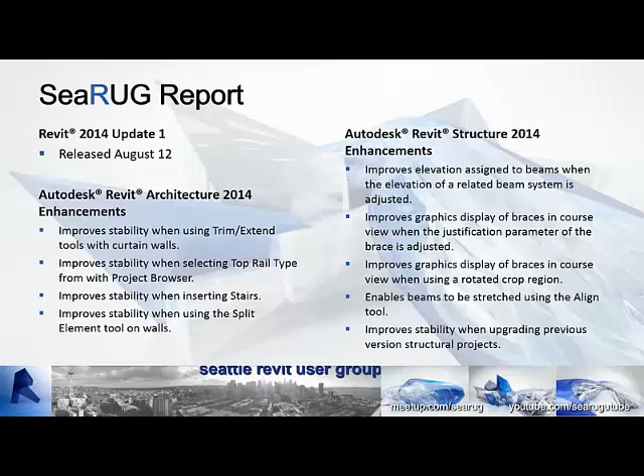A handful of MEP updates. These will all be posted, it's all on a PDF list, so as soon as you go to get your update you'll see all these plus a whole series more.

I just wanted to grab some of the highlights and some of the overall platform, exporting if you use that, rendering in cloud. I know we use that a lot, so see some of those, a handful of improvements there.

This was interesting: it maintains display order of filled regions which overlap solid hatches in projects that are upgraded to 2014. So if you've already upgraded your project, sorry, you've got to go fix it. But there are a lot of companies with a policy of not upgrading until the first service pack comes out, quite a few actually do that. So this would probably be a good opportunity to start planning your upgrade now that the service pack is out. It sounds like they've fixed a lot of stability and some performance issues as well.

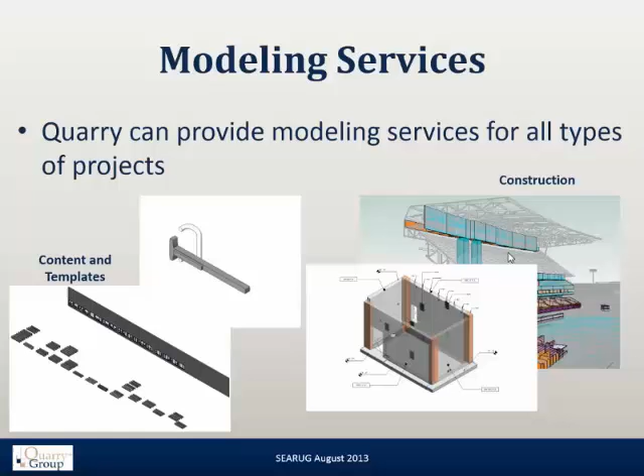We also work for design teams, helping them set up their content, building custom families for them, getting their systems and templates all set up and ready to go. Here's some of our coordination takeoff models. We've also worked for owners doing as-built and facility management models.

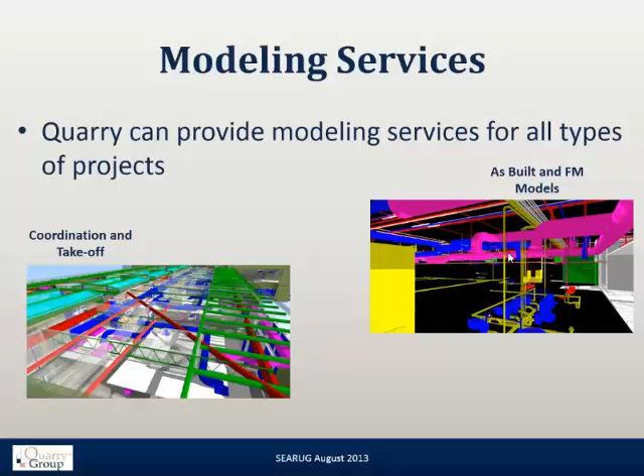One of our latest services that we've been doing for a lot of our client teams is BIM management. We work for either a contractor or, in some cases, the architect, managing the BIM process throughout design and construction and on into ownership. Some of the things we'll do is set up a BIM execution plan to help them work their way through the process. We have BIM websites that we've set up that let people upload and download models, exchange information, and help people collaborate inside a BIM environment.

If people are interested in that, we can certainly help you set up your models and your project. We can do quality control reviews, constructability reviews, and collaboration tools, so we can figure out what you guys need to work on, areas of the model that are problematic, and areas of the model that are really well put together.

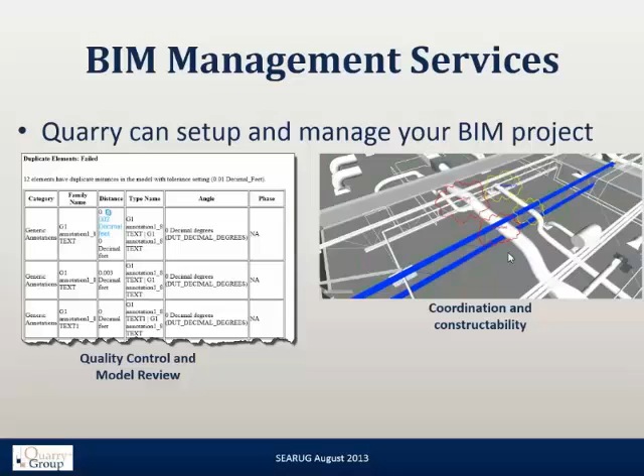Okay, so today we're going to discuss detailing in Revit. Let me see a show of hands: how many people here detail exclusively in Revit? About a third. How many people detail exclusively in CAD? How many are 50-50?

So we're going to discuss some common issues with detailing, and why people don't do it. We're going to look at the tools that Revit uses to assist you in detailing. We'll look at 2D detailing and 3D detailing, and discuss the pros and cons of each. We'll talk about how you customize your detail component families, then create an overall strategy for detailing, and we've got a question and answer period.

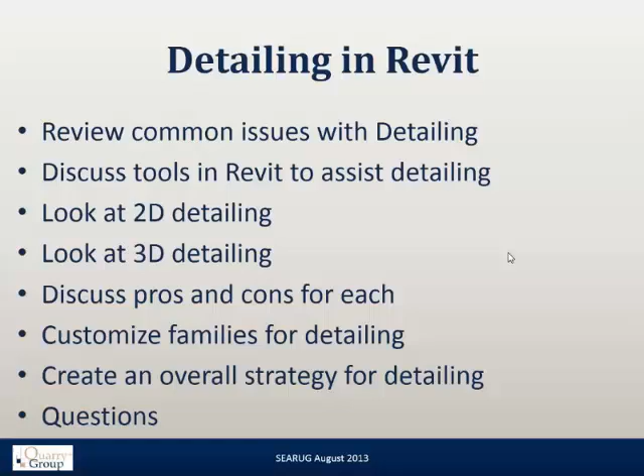So, some common issues with detailing, or roadblocks as I put them. The first one I always hear from people is, well, if you do it in Revit, then all your details have to be 3D. Doing your details in Revit makes your file size go crazy. Detailing is slower than if I do it in CAD. And Revit has poor drafting tools—I use the word poor, but I've heard various other adjectives used for Revit's drafting tools.

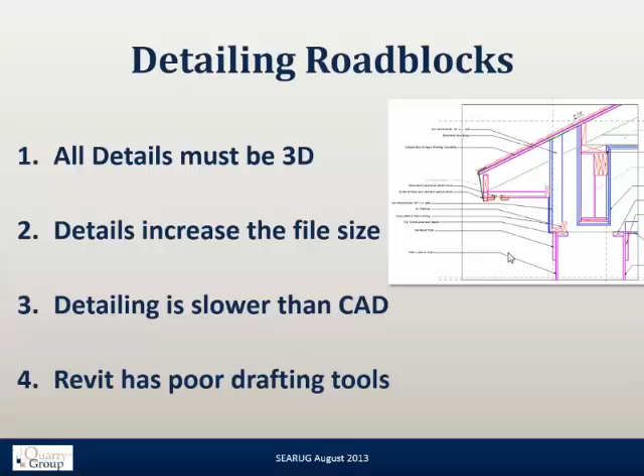I won't use the four-letter word that I've heard a number of times.

Number one: all details must be in 3D. False. Revit has tons of two-dimensional only tools to help you build your 2D details. Drafting views, which have been in Revit since release 2, were specifically designed for people to draft 2D details. They have very little other purpose.

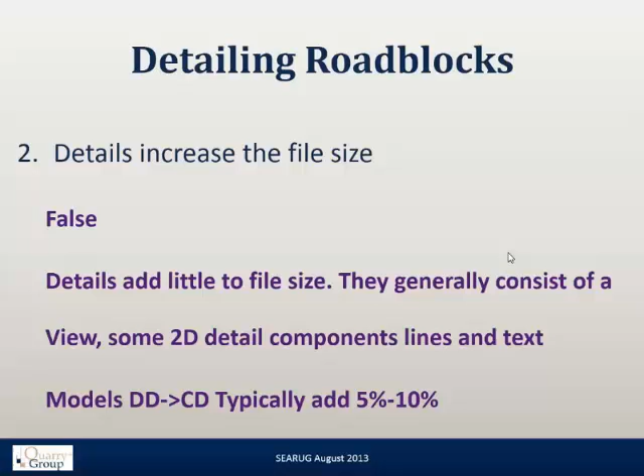Details increase the file size. Also false. They do very little to add to the file size. Obviously, as you add stuff to your file, the file gets bigger. However, most 2D detail components, lines, and text add very, very little to the file size. Our models, typically between DD and CD, see a 5 to 10% file size increase.

Detailing is slower than CAD. This one's a bit of a loaded question because slower is somewhat subjective. But if done correctly, we think Revit can save you time in your detailing.

The first reason is printing from a single system and file. When we tried to do composite detailing with sheets and sheets of AutoCAD details and sheets and sheets of Revit drawings, it took us all day to plot. We had to set up special dummy views, set up dummy sheets, go back and check every single CAD detail to make sure the references were correct, and then plot and plot and plot and plot.

Utilizing the model as part of the detail: Revit's model can show you a lot of information that you don't have to redraw. This gives you faster revisions. If the model changes, those areas already being driven by the model won't have to be redrawn or edited or changed.

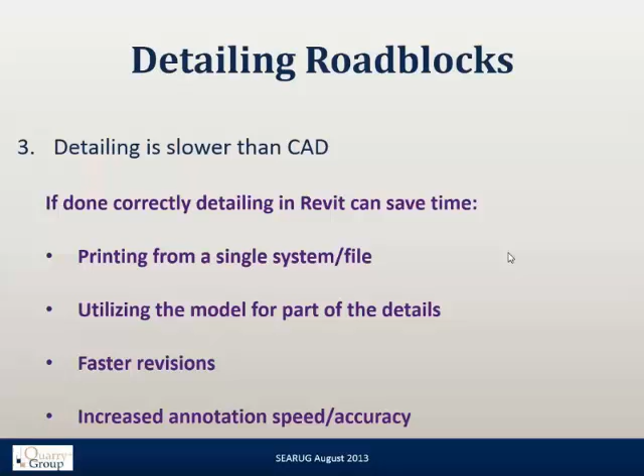And then there's increasing annotation speed and accuracy. We've got some annotation tricks that'll help you improve your annotation speed, so you won't have to be typing text notes all day long.

So, Revit has poor drafting tools - also subjective. Revit has different drafting tools. We miss the precision, the snaps, and the awesome editing tools that AutoCAD has: the ability to extend multiple objects, multi-trim, fence commands, and all those other tools AutoCAD developed over the last 30 years specifically for drawing. Remember, that's all AutoCAD does - it draws. Revit has never invested in those tools because Revit does so much more.

There's really not a need for that if you learn how to use Revit's detailing tools the way they were intended to be used. What we look for is using components and pieces of the model rather than drafting from scratch.

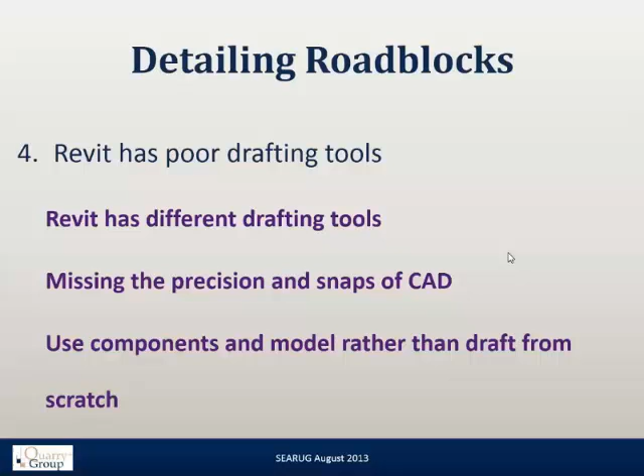So, Revit's drawing and editing tools do not equal CAD. That is clear - AutoCAD's drawing tools are much more superior than Revit's basic drawing tools. But if you use them properly, you will save time and effort.

Now, the way we see it, setting up your details at the beginning correctly will allow you to move through the system a little bit better. The first thing is, rather than use drafting views, we want people to use the detail tool and the section view tool. A couple reasons for this: first, you can utilize the model if you choose - it's not required, so you can turn the model off in your detail views.

Number two, your details are then organized together. Here's a shot from our project where we organize all of our details together, and you can see that each detail type has its own folder under our project browser. Very easy to do.

And we'll talk about this a little later - we have pre-built view templates that already set up most of what we want it to do when the detail is created. It comes out of the box all ready to go, and all we have to do is fill in some of the blanks.

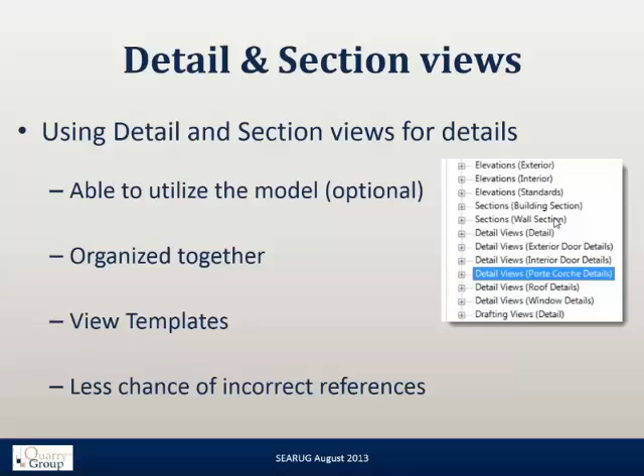So this is direct from the detail cut, and what I did was I turned the view template off on this one and turned it on this one.

So in this case, this would be a detail that was cut, and you can see we've got roofing materials, fascia, roof joist, structural, and ceiling joists already ready to go. If we were going to just go straight forward with this detail, we would leave it alone. But by applying a view template, we halftone it first, and then we apply a second view template, the model goes away entirely, and all we're looking at is our drafting.

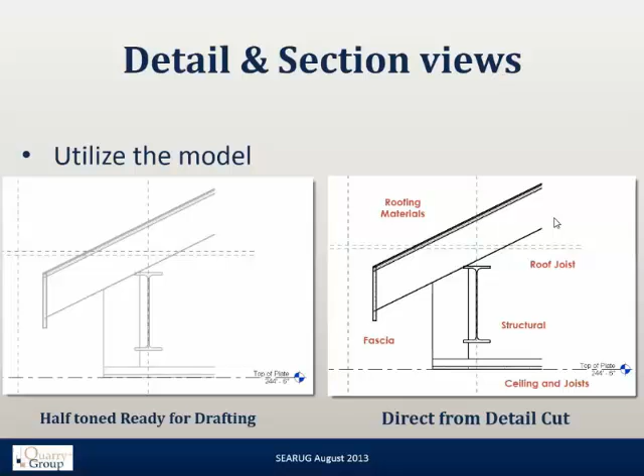So just by utilizing the model as either an underlay or as part of the detail, we're already ahead of the game as far as drafting is concerned.

We set up our details to have different types so that when we cut a detail, we pick the right type, and Revit automatically puts our details in folders together. This way, we don't have a thousand details under the detail view in Revit, having to scroll down through that list over and over again. We can open up the roof details and just look at roof details, open up the door details and just look at door details.

Templates. As I pointed out, we've got view templates already set up. So we've got 1.5-inch details, 3-inch details, 3-inch HS head jamb sill details, and a generic detail.

What those view templates do is they set up the model and the view to display the model the way we want it to, and to display all the items the way we want. It can update line weights, turn off linked views, turn off CAD, turn off whatever else we want. So our view templates are preset, ready to go.

So when a user cuts a detail and picks the right type, it automatically creates the detail the way they want it to be.

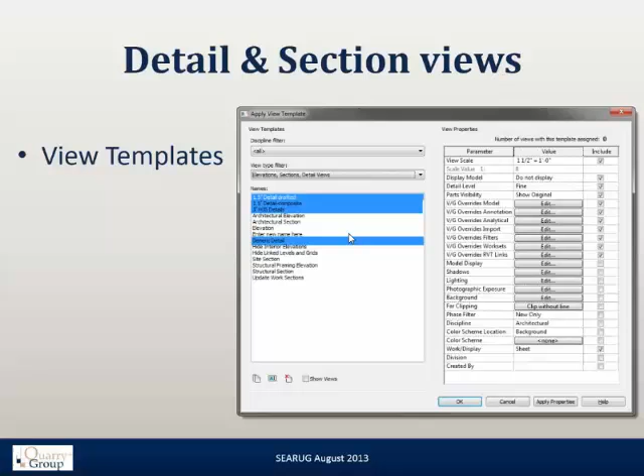Okay, and incorrect references. This is the list of views that are available to use as references for a particular section cut, and you can see the list is quite long. Now, luckily, Revit does show you the number and sheet you're referencing, but it is very easy, and I've done it hundreds of times, to accidentally click one above or one below.

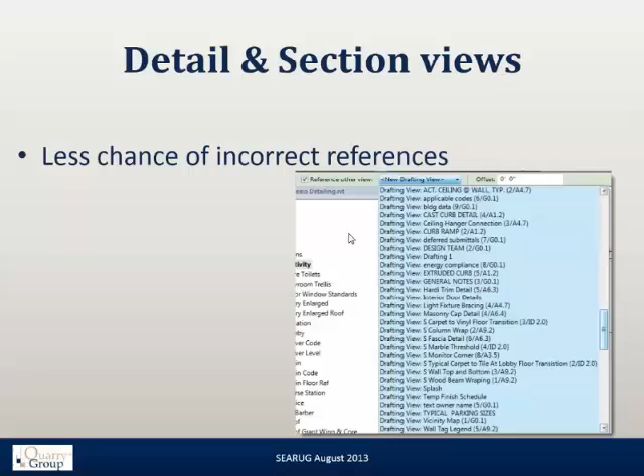And then your detailing system falls apart very, very quickly.

So, detailing tools. Number one, with 3D tools equaling 2D details, we're going to use the model element to start our details whenever we can — system families, walls, floors, and roofs.

So again, we use view templates to save time. What we're looking at here is a detail that I just cut, and it's all set to go.

And if I don't have a view template, I usually do things 1, 2, 3, 4. One, I set the scale. Two, I set the level of detail. Three, I crop it the way I want it. And four, I set the visibility controls. So I do all that when I create the detail rather than later down the road.

Now, if we've got a template, it can save me the time of having to do 1, 2, 3, 4 — or just 1, or 2, or 3, or 4 — depending on how the template's set up.

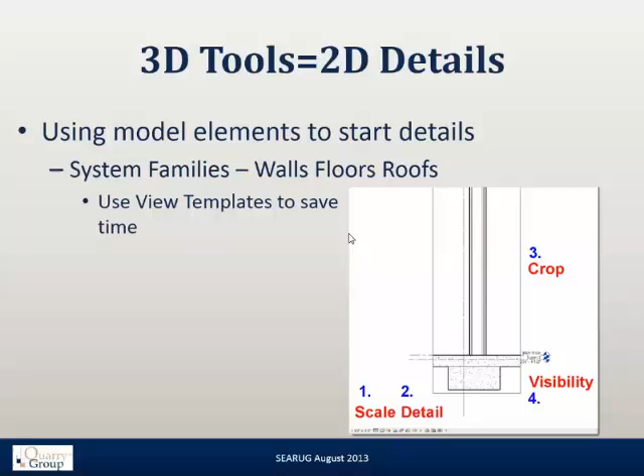Parts. How many people here have used parts? Few, okay. So anybody know what parts were originally created for? Yes — Rob said contractors.

He is correct. They were created for contractors because something like a wall, floor, or roof has 4 or 5 different trades in it, and we can't combine them all together. We've got a steel deck, rebar, concrete, or in a wall's case, GWB, insulation, and metal studs. Those might be from 3 different groups or contractors, and they'll probably go into the model at 3 different times. So Revit lets you split the parts out so you can control the timing of the various pieces.

However, the parts also make awesome detailing tools. We've used parts tons of times to help us create our details. There's a couple of things you can do with parts that make your details look better and work better. The way you make parts is you click on a system family and hit create parts, and boom, Revit splits it out.

Now the great part about parts is the original family is untouched — it does not explode the wall. It creates a series of parts on top of that wall, and you can tell Revit: I want to see the original, I want to see the parts, or I want to see both. Or you can delete all the parts and not hurt the original object in its entirety. So they are completely safe to use. There is no downside to them except for one, and I'll get to that in a minute.

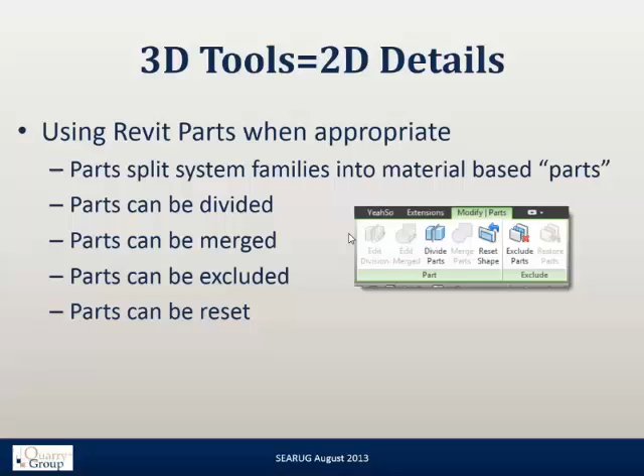Now, the downside of parts: they do add to model size. It's not much, but the more you make, the more you'll see your models grow. When you go to regenerate specific views that have lots of parts in them, it will slow it down. We've done a couple of projects for contractors where we split out entire sets of walls or entire buildings into parts, and when you go to open a view, it takes 30, 40 seconds to regenerate itself. So again, use them when you need them, but don't automatically break every object you see into parts.

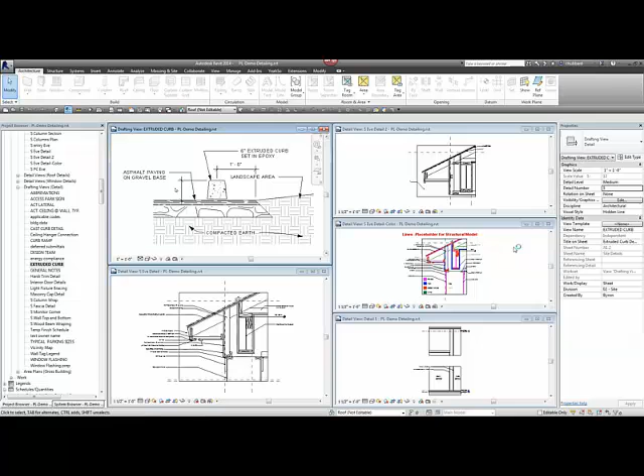So let's take a look here. Here's this detail again. Now, we've already split it into parts, so I'm going to go ahead and just filter out my parts and just delete them.

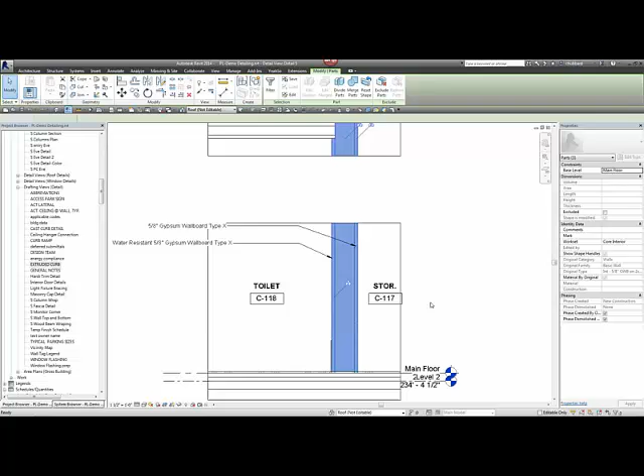Now, I just deleted the parts. You saw the wall disappear, but then it came back because the original wall was still there. I didn't hurt it, I didn't change it, I didn't edit it. It's still exactly where I left it. So if you get down the road and you're having problems with your parts or they're not working for you, it's as simple as just grabbing them all and deleting them. So I've got my wall back.

Now, a couple of things I want people to notice. The wall-ceiling intersection is wrong, and the gypsum board goes all the way up to the underside of this rated ceiling up here. And its interface is also wrong.

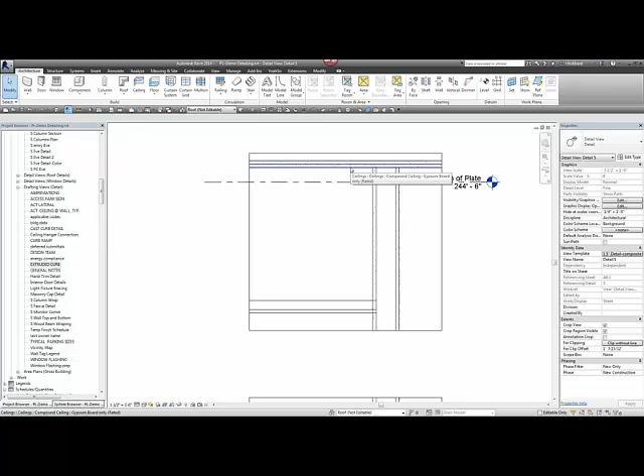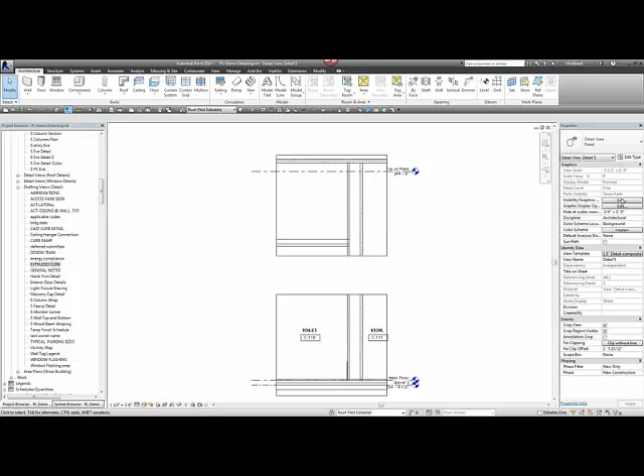Now, let's go ahead and grab this. The Create Part button is right here at the end of the Modify Walls. Go ahead and click it, and it's going to go create some parts. Now, my view template is taking over here, so everything in the view properties is grayed out, but what it says is show parts. You kind of see it right up here.

And so the original wall has now disappeared. Can't see it anymore, but it's still there. If you go to a different view, it'll be there. Now I've got these three parts.

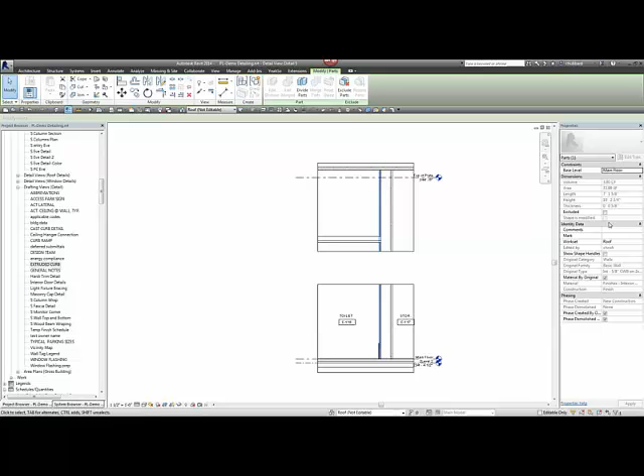Now I can immediately fix this problem. I click on this part, and I click Show Shape Handle. I've got my little shape handle, and I can drag it down to right there. Now that detail's starting to look more correct. This side doesn't have a ceiling over here, so I guess we'll leave it go all the way up.

Okay, we can go ahead and show shape handle here too. We could pull this up and then put a detail component in here to show something different. Let's say we wanted to put a wainscoting in there, or if we had some masonry or stonework we wanted to put in there. We can adjust these. We haven't hurt the original model. It still shows the way it does.

Your interior elevations might be different, you might need some work there, but you can create really quickly some very fast details by using the parts to take care of some of the little idiosyncrasies like the ceiling cleanup that Revit has.

Those are view specific. No, well, they're not, because the parts are model. Rob asked if they're view specific. They're not, because you're adjusting the parts, and they will adjust in all views the correct way. But if you turn the parts off, if you go back to this view property and say show original, the parts go away. They disappear, and you're back to your original model. So it's not view specific.

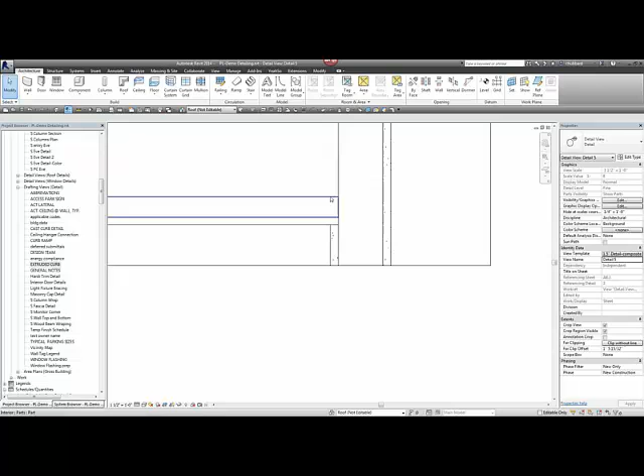They are model pieces. So if you went down that wall 10 feet and cut it again, you'd still see it, you'd have the parts option. Yeah, so Rob asked if you went down the wall and cut a different detail, you would still see the parts unless you switched it back to show original.

The other thing is that you can drag the parts beyond their host. In the case of this ceiling, I've already done that, but I wanted to show you that for dramatic purposes. So the ceiling stops at the actual face of the wall.

When you look at a GWB ceiling interfacing with a GWB wall, the gypsum board of the wall runs past the ceiling, and that's the way Revit does its ceilings, and it has since day one. My thought is that when they designed Revit's ceilings, it was designed for something like an ACT or a lay-in ceiling where it goes up to the gypsum board, but when you do an actual GWB ceiling, you'd like the GWB of the ceiling to be over the wall so that it doesn't sag.

So those sorts of things Revit has always struggled with because of the differences in how buildings are built depending on their construction method.

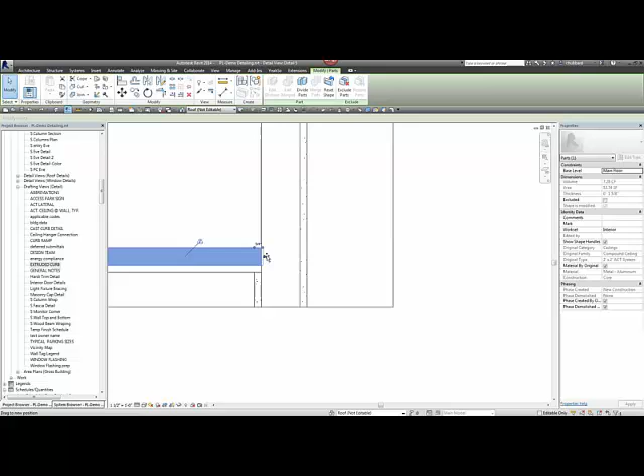So the ceiling actually stops right here. What I did was I already dragged this past, and I dragged the joist past too, so that they interface with the wall. Now if this were steel, maybe I'd even do this, and then put a couple detail components in there to show that they're tacked to the edge of the stud. In this case they're wood, so they probably run up to it, maybe they go behind it, depends on how we built it.

So the parts now have given me the ability to start my detail while still using the model. I haven't introduced any two-dimensional items here yet at all.

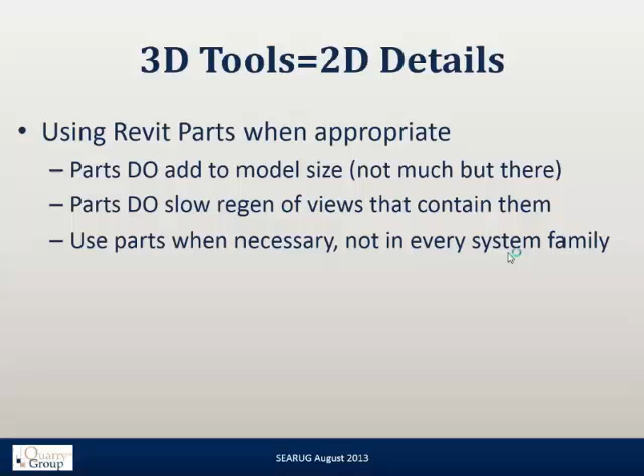Now, 3D details. Anybody here use 3D details? Okay, I see some contractors raising their hand.

Now, ever since Revit—I think it was 11 or 12—they let you dimension inside 3D, when they lock it. I think it was 12. So since 12, we've been using 3D details where appropriate.

I'd love to get to the point where we could just always do all 3D details all the time, but we're not there yet.

Now, what they can do is convey information that would normally be contained in multiple views. This helps you from a production point of view in that you don't need to do plan, section, elevation of a particular object, but it really helps the recipient, i.e. the contractor, because what you've conveyed to him by drawing this in 3D or presenting it in 3D is: this is an important part of the building and I want you to take another look at it.

Now, lots of architects are handing models off to contractors and saying, here's my model, go figure it out. Walking through a giant model is very similar to flipping through a 300-sheet set of drawings. You don't know where the important stuff is until you spend some time with it. Well, we all know what construction is like—time is something nobody has.

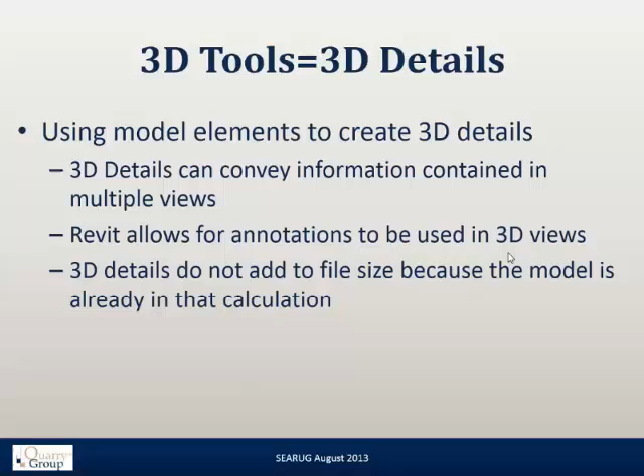Now, one of the reasons we did this is this roof monitor is actually not visible in any of our exterior elevations—it's behind another roof in every single view. So we would have had to come in and do a separate exterior elevation of the roof monitor.

We would have had to do a ceiling plan, a roof plan, actually 4 elevations, and at least 2 sections. All of that information - and we did do that, by the way, because the architect we were working with was still uncomfortable with this. But that being said, we'd still present this as it is, because this was nearly free. This took about half an hour to build, because the model was already done.

When we did all this, all the information that was conveyed on, I think, 12 views is picked up in a single view. So we were able to do that very, very quickly.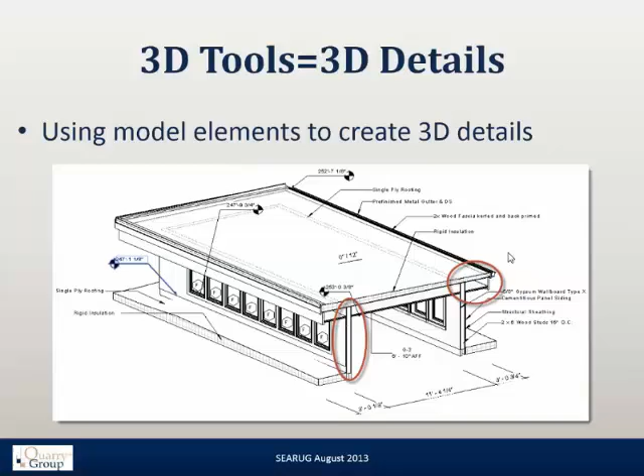Okay, got ahead of myself there. Anybody have any question on 3D details?

Okay, 2D details. Now, as I said, 3D details cannot take the place of 2D - we still have to do it. I'd say 90% of my details that we produce are all two-dimensional. We use those 3D ones as sort of frosting on the cake, as it were. Now, parts are great, and we use them a lot, but they are not the answer for all detailing scenarios.

So for most of our detailing, we use detail components. Revit's detail components are two-dimensional elements that create intelligent details. They're easy to create and modify - they take 5-10 minutes each. They're family and type driven, just like every other object in Revit. They have a very small footprint - some of my detail components, I think, are 3K. Not meg, K.

And Revit already ships with a full library. There's 620 detail components in the out-of-the-box Revit library. Now, that's just the families - each one has upwards of a couple hundred types. I've never actually been able to calculate how many families and types there are in there, but the steel beams alone have 700 types. So there's a couple thousand possibilities in just the out-of-the-box Revit library.

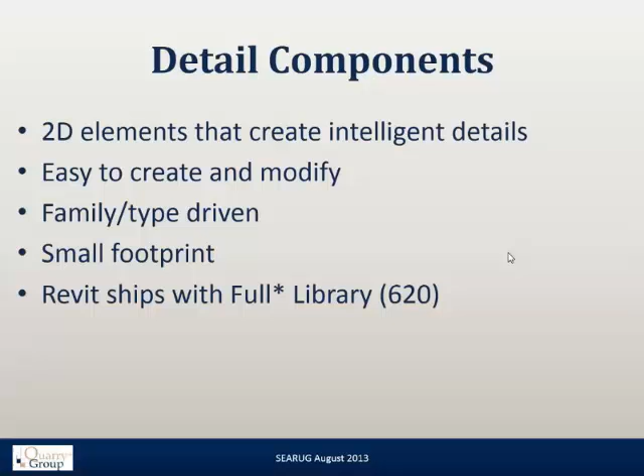So, a couple of things to remember when doing detailing in Revit: all your 2D elements sit on top of the model. This can be both good and bad - remember, there is no way to get a detail component to appear behind the model. You have the ability to control the line work inside your component, so you don't need to use the line tool as much as you think you do.

And since they're type driven, as you can see, this is my wood variable width 2x. So we have a detail component that's a 2x, basically a section cut that covers all of our 2x lumber requirements - one family, half a dozen types.

So here's an example of that. These are all the same family. We use them to mask or cover the model elements. We can control the line work, and our type drives our annotation tool, which we'll talk about in a little while. All of our size, opacity, and blocking settings are instance-based. Here are the properties - here's our blocking control that turns blocking on or off, makes it a single line versus an X, and this is our opacity control, which allows us to see through or have it mask the model, or whatever else is behind it.

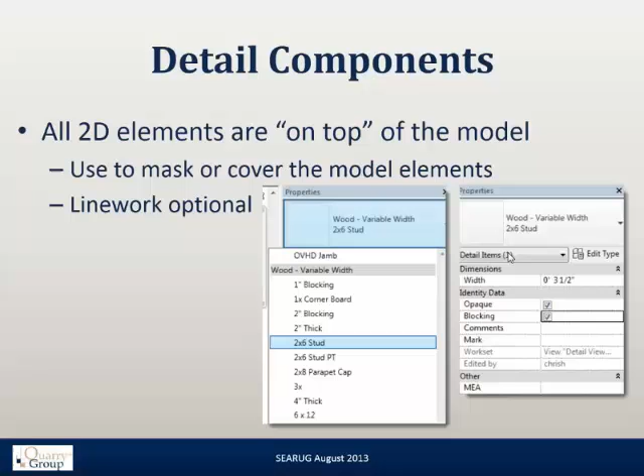So you can see right here, this is a blocking. This is a refer to wall assembly for stud, and this is a 2x framing. These are all notes that we've developed and can be edited at any time, but they will not edit together because they're 3 different types.

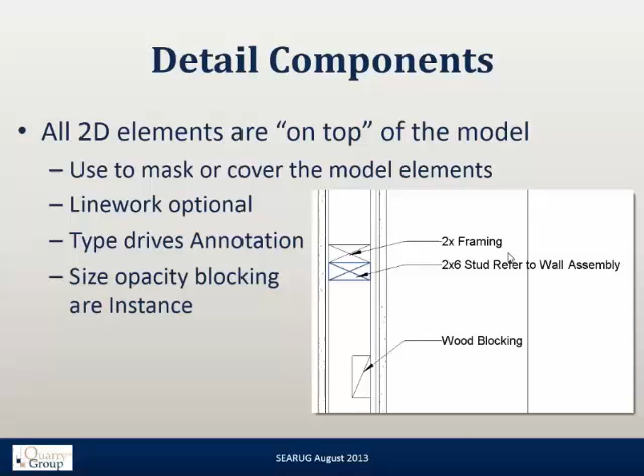Now, when you make a detail component or edit one of the ones that comes with Revit, you will discover that they consist of very simple objects. 90% of them consist of a filled region or a masking region, okay, Revit's version of a hatch pattern. Some of them have lines defining the boundary of the region and an additional line for other graphics. Some of them are basically just masks.

The masking region or the lines can be visibility controlled, and we use types to control the annotations. So this is the family that we've been looking at in the family editor. The box that outlines the actual stud or board is a filled region with thin lines around, or medium lines around it. And then there's the 2 X's, one of them controlled by a yes/no parameter.

This took me 10 minutes to build in its parametrics. We have used this well over hundreds of thousands of times over the last 10 years. So it's absolutely paid for itself.

Both of the dimensions are instance parameters. But the 1.5 inches is locked, because this is a 2x, we don't want them changing the thickness of it. We also have a 3x and a 4x and a 5x, and a number of other width ones. So the width is always fixed, the length is adjustable.

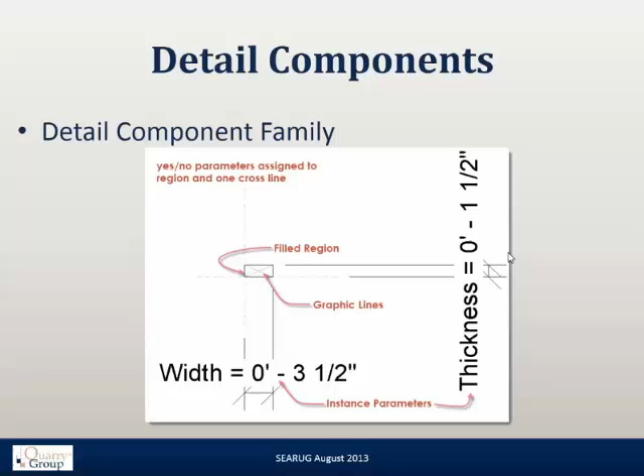And we do that because Revit ships with a 2x4, 2x6, 2x8, 2x10, 4x4, et cetera. Well, what happens when you need a 2x5? Or what happens when you're pushing a piece of blocking into a corner of a roof and you need it to show cut off at a funny dimension that a carpenter is just going to get a saw and cut off? So this gives us the ability to say we need a 2x2.5, or whatever we need as a blocking size to fit into a particular location.

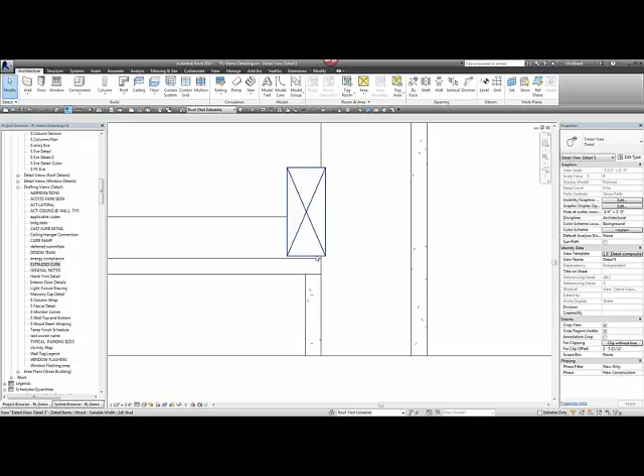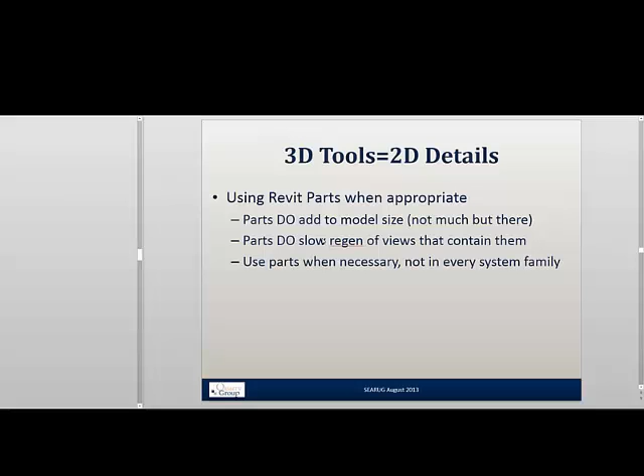So here's my variable stud, variable width. We can go ahead and plop it in here, let's say... okay, and so you can see... there we go, sorry.

So let me go ahead and place a detail component. So we get that right here, detail component. So this is the 2x. I'm going to go ahead and put it right here, and you can see it's masking the model behind it, covers it up. If I turn off the opacity, you can see the model behind it. And if I turn off the blocking control, you can see it shows as a single line.

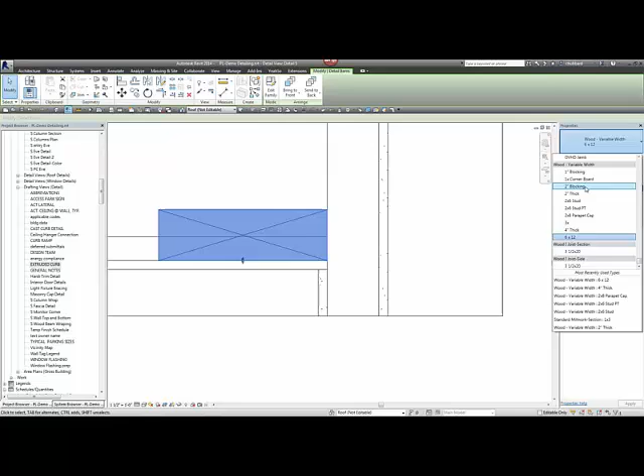And when I change its type, you can see nothing is really changing about it. Okay, that one's a little different. Nothing is really changing about it because all we're changing is the annotation in the background, and we haven't annotated it yet, so we don't actually see any updates to it.

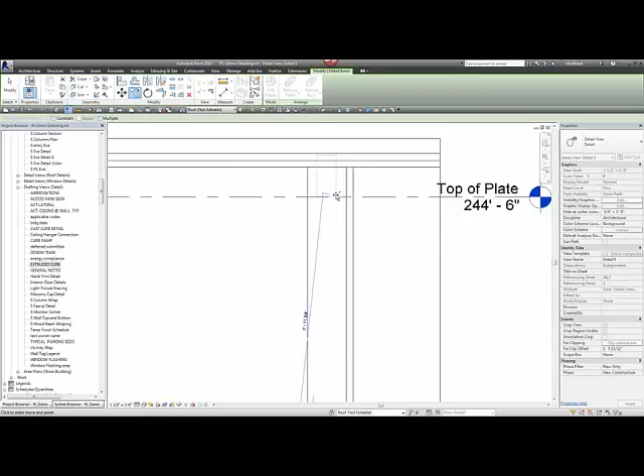So we can go ahead and copy this over to here, and let's take it up here, and we'll rotate it... there we go. And we'll move it up into position, and we'll copy it one more time to make our double top plate. Like that, okay? So we're really quickly starting to build out this detail without spending a lot of time at it, and we can start to use things.

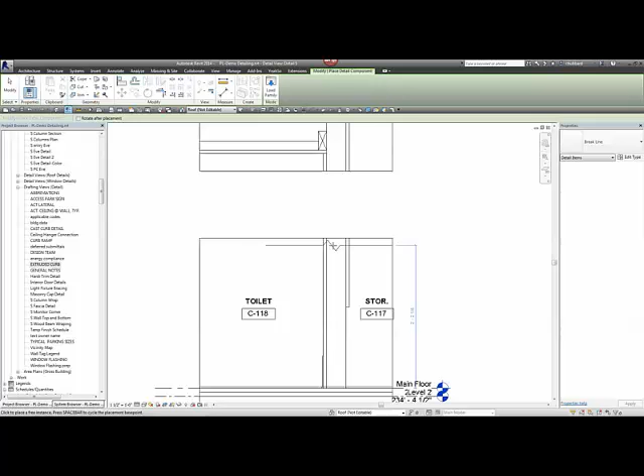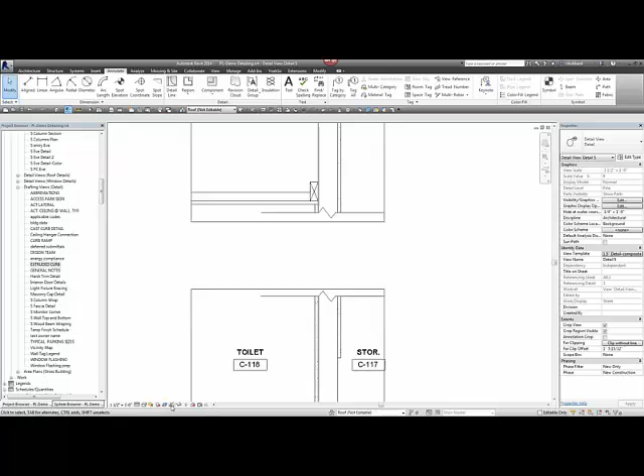So one of my other favorite ones is the break line. So we can come and put our break line in here, and our break line in there. You see the break line's got a mask on it, so we just need to rotate this one around like that, and then pull it into position. And by putting it up against the crop region and turning off the crop region, which doesn't print by the way, you can get a nice broken detail.

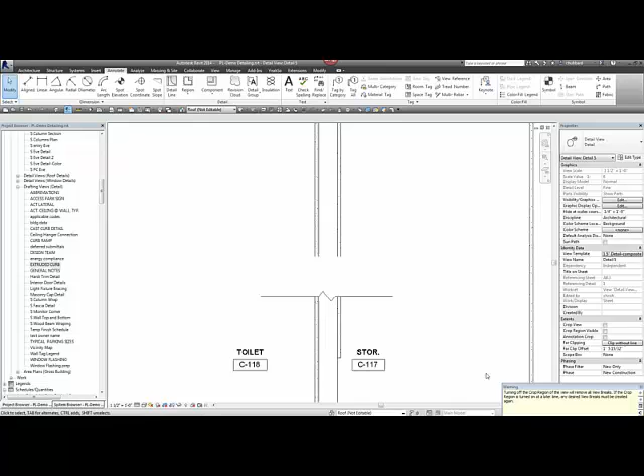We've got a number of different break lines. We've got one that has break lines on top and bottom, so you can split a detail out, and just mask the detail itself without using the crop region. We've got them with different sized break conditions and all sorts of different things like that. Oops, accidentally turned off the crop region... there we go. So you can do a number of different things with these break lines and with the masking tools.

Now, the big time saver in using these components is the ability to automate your annotation. For our detailing, we primarily use these four items, and we use the top three rather than the keynotes. We'll talk about the different pros and cons of each.

So the first one we use is material tags. Material tags are extraordinarily versatile because they will tag the material that they touch, no matter what it's in. So if you've built a material into your element, then the material tag will identify it.

The detail component tag is just like a wall tag or a door tag or a window tag, but it tags detail items. So those wood studs that I've been placing in there, we can tag them with a detail component tag, and it will identify them. We also build custom model component tags to identify different types of model components as well.

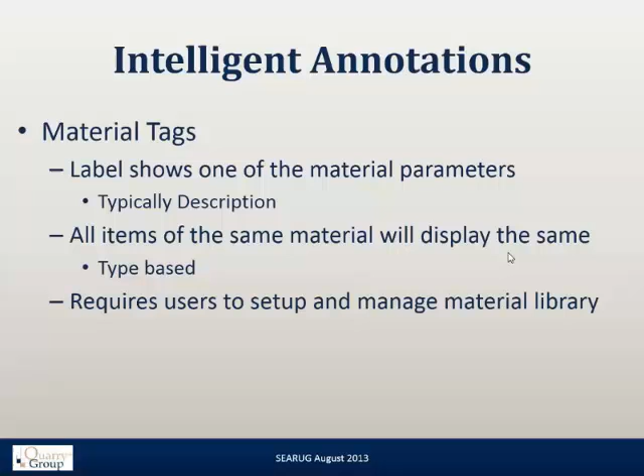So the material dialog box shows you what all the materials are. The tag can read from the following locations: comments, cost, manufacturer, mark, which is the type mark for the material, model, name, URL, or you can add your own custom shared parameter if you so choose.

As I said, we use the material description as our note. Anytime we need to change the note, we have to make a new material. Not real hard, just have to remember to do it.

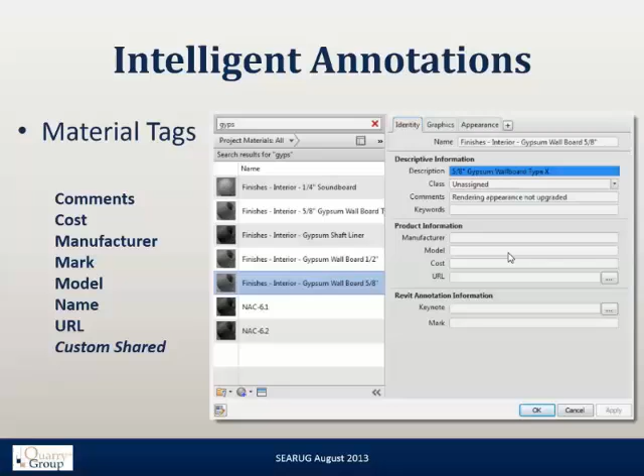Detail tags. Detail tags tag any detail component. Now that means they will also tag filled regions and symbols. So the detail components, filled regions, and symbols all tag with the same tag.

You can use a common parameter that's already there; ours uses the type mark. Or you can create your own custom shared parameter for the detail items. And the parameter, by the way, can be type or instance based.

However, if you make an instance parameter for it, you'll have to retype your notes for every single one. If you use the type parameter, once you fill out a note for a particular detail type, you will never have to type that note again in this project.

And we've started to build our detail component library with the notes already baked in, so that when they come into the project, we don't have to type the notes at all.

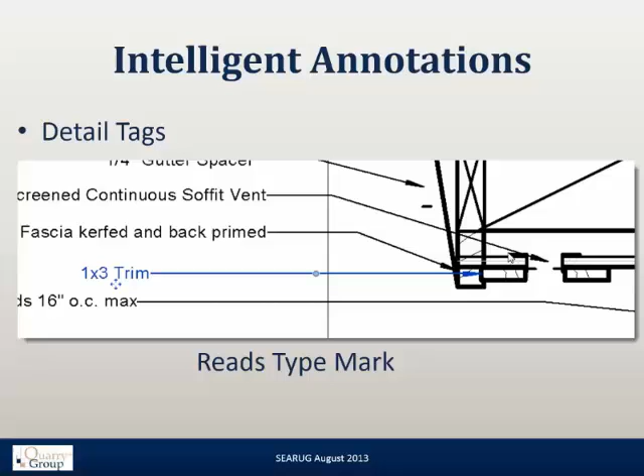Okay, now model component tags. If you're using 3D model elements as part of your details, you will need to be able to tag those components as a detail. We don't want to tag our wall and just have it say wall type A1.

We want to be able to tag our wall and show all the different components of it. We want to be able to tag our structural elements and show the different components of it, and not just have a generic tag. So we often will develop special tags that tag model components as if they were part of the detail. Part tags.

How many people here knew you could tag parts?

I didn't know it either until about a year ago. It never even occurred to me that you could tag a part, but you can. And parts don't have a type, so all of your tags will be instance-based, which doesn't really get you anything because you're still going to have to type the note every single time you tag the same part.

But they do tag with the material tag, and I'll show you a shortcut here to make your details look better using the part.

How many people use Revit's keynote system? A few, okay. So the keynote tags work exactly the same as the material and element tags, but they're driven by an external file as opposed to the notes in the internal file. So basically, you grab your keynote tag, you tag your element, Revit brings up the dialog box and asks what the keynote you'd like to pick is. You pick the right keynote, and from then on, that element tags with that keynote. And if the external file changes the note, your keynotes will update.

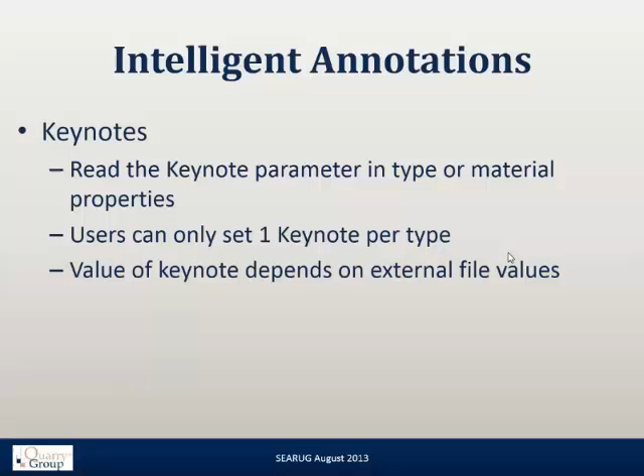Now, you can only set one keynote per type unless you use the user keynote. And the value of that depends on the external file. And so if the external file is wrong, your keynotes are wrong.

The keynote file is a text file, very simple. It's tab delimited. We often use Microsoft Excel to read them, edit them, and create them. And it has 3 columns of data: the keynote value, the keynote description, and the level above, which allows the keynote dialog box to expand and collapse. Now the keynote value has to be unique.

If you look at the Revit keynote file, you'll discover that it is the master format ID. So Revit's keynote files use master format as their unique identifier. The keynote description is the note that you would like to appear when you keynote something. And then the level above obviously controls whether you want it to expand or collapse.

File can be firm-wide. So do you guys use a firm-wide keynote file, or is it project-based?

Okay, so he says both. And there's good reason for that, because if you need a unique note and you're keynoting, you can't do it. You got to go back to the file and put it in there. Or you have to use one of the other tools.

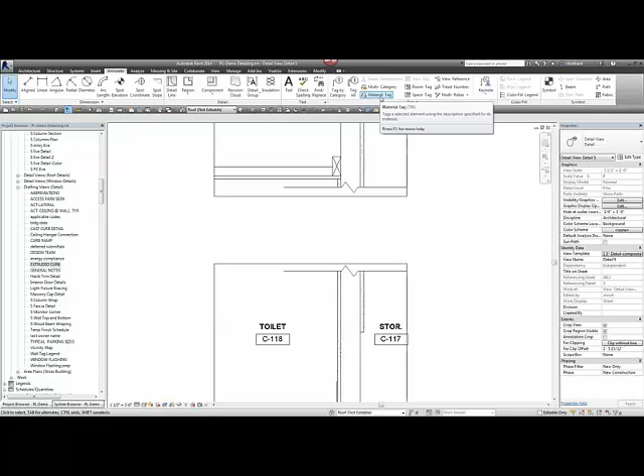Okay, so let's look at some annotation. Here's my tag by category, and here's my material tag. So I'm going to go ahead and tag this right here. It already automatically tags, and I can go ahead and tag this. Now you see this doesn't have a material. Anybody know why? Because it's a two-dimensional detail component.

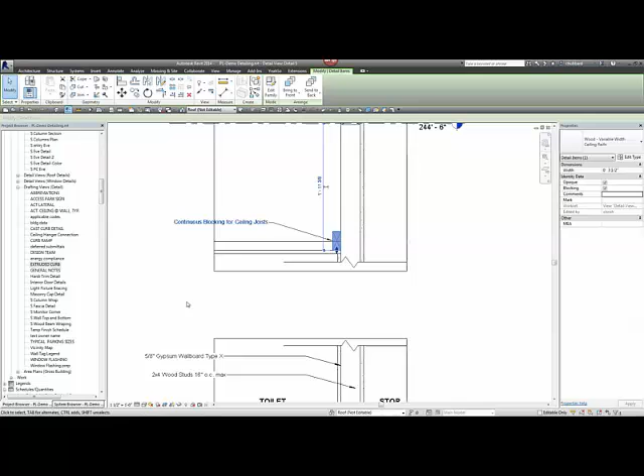So in this case, I have to use the tag by category, and it identifies itself as wood blocking. If I change its type, you see my note is updating. So I can change my notes by just making new types. And if we needed a special note for this, we can come in here and update our note. Now, in the future, every time I use that particular type, the note will update. I don't have to type that note ever again. This absolutely saves us a ton of time down the road when we go to use our detailing. We only type our notes one time per project until we need a different note.

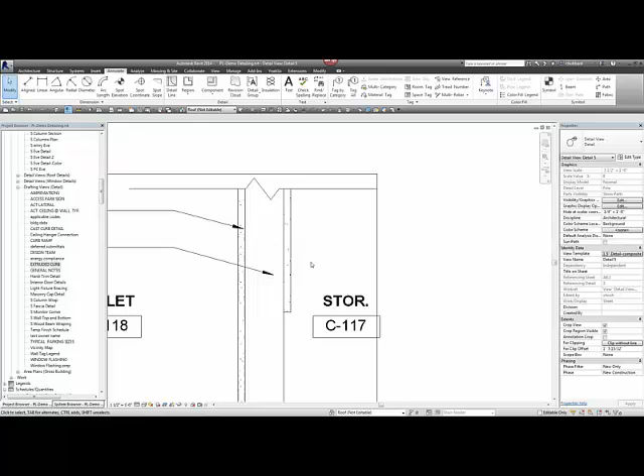Now here's the other cool part I like to talk about, parts. How many people here have a bathroom in their building? Come on, everybody raise your hand. Okay, how many people make a new wall type just to get water-resistant gypsum board on the bathroom side of the wall? How many people put a text note in there that says water-resistant gypsum board rather than redo their wall type? Okay, now let's assume this is not a storage room, and let's assume this is a bathroom.

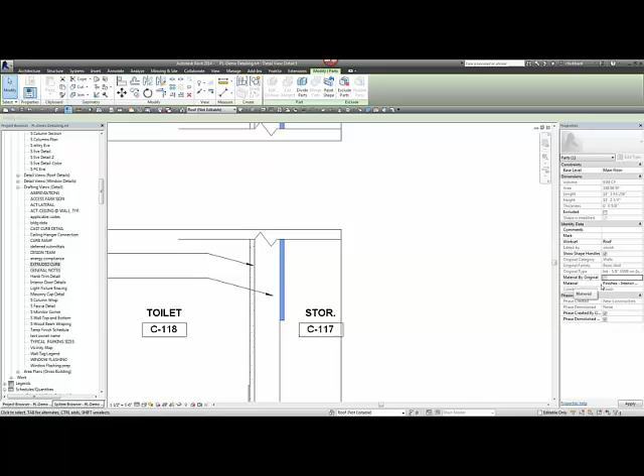We have our part on this side of the wall. Down here is this nice little parameter that says material by original. If I uncheck that, the material parameter lights up, and I can pick a new material for it. I'm just going to go ahead—wait, do I have a water resistant already? No, I don't.

We'll just say WR. Okay, and I'll come over to my identity here, and I'm just going to type. Okay, and now I'm going to use my material tag to identify it.

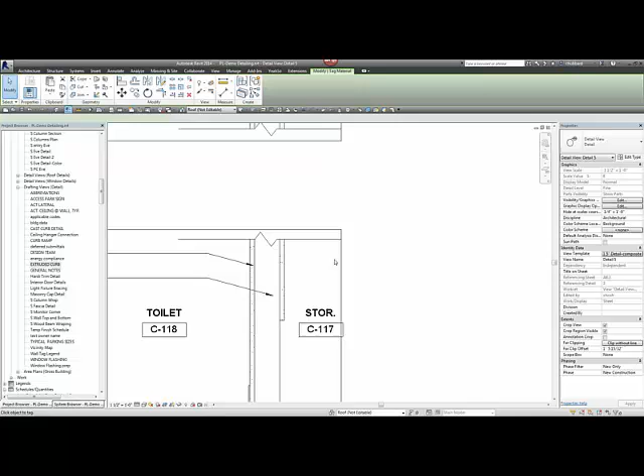Now, I've not made a new wall type. My wall types are still intact. The original wall still is intact, it hasn't changed. But by changing the part information, I can update my details where I need to.

Now, everybody, you know, the BIM purists among us will say, well, that's not very BIM. You should create a new wall type because then everywhere you have a bathroom, you'll automatically have it, and the owner will have it down the road and on and on. But the reality of the scenario is you would end up with thousands of wall types just to change the paint color on one side or the other.

And we end up with cases where we've got ceramic tile on part of the wall, and we'd have to stop the wall and pick it up with water resistance. So there's all these different configurations, and the contractor already knows not to put regular gypsum board in the bathroom. He's not going to go do that wrong. It's great that you have the detail that shows him, but he's probably not going to screw it up. He'll probably come back with a change order because it's 10% more than the regular one, but at least in this case, you're covered with that.

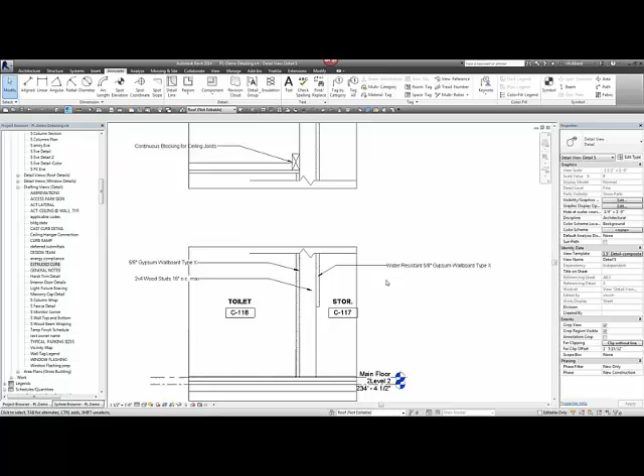But we all know that buildings have been built before this happened, and we all know that taking BIM to that level may just be overkill. So this is a quick way for you guys to update, using the parts tool to allow you to change information in just that one little spot where you need it to be.

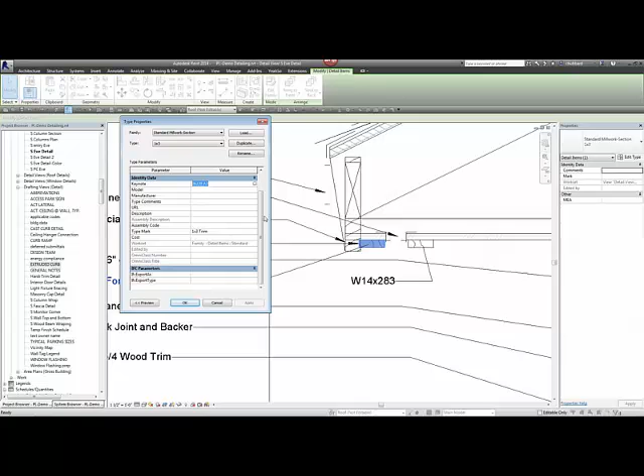So this is my keynote file, our keynote tag that we were talking about earlier, where it was obviously incorrectly keynoted. If you click on the detail component itself, you'll see that it has a keynote value right here, and that is what's driving the main keynote for it. So if I just go ahead and grab my keynote tool, element keynote, and click on it...

Okay, you can see that it's picking up the right information automatically. This note has its own property that's picking the keynote from the list, and this is the keynote list right here. So let's go ahead and clear out the keynote value for this. Click OK, you'll see everything jumps to a question mark. And the keynote file that I'm using is set right here.

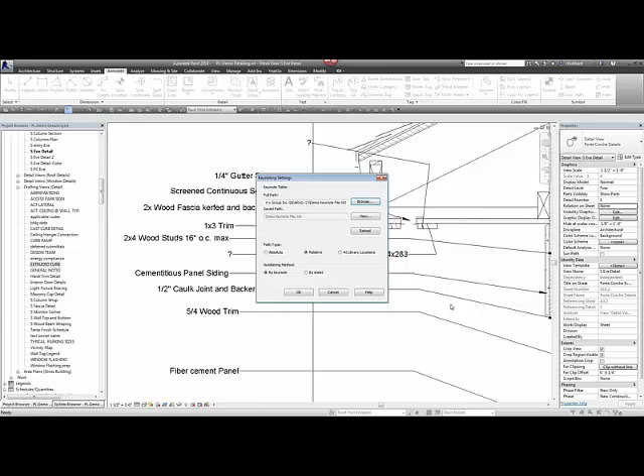So you can go browse for it. There's our demo keynote file. So if we go into here, we grab this guy, we go to its types, go to keynote, so we'll go to 06 and go to 06200, and there's my note right there. Click OK, click OK, and it updates.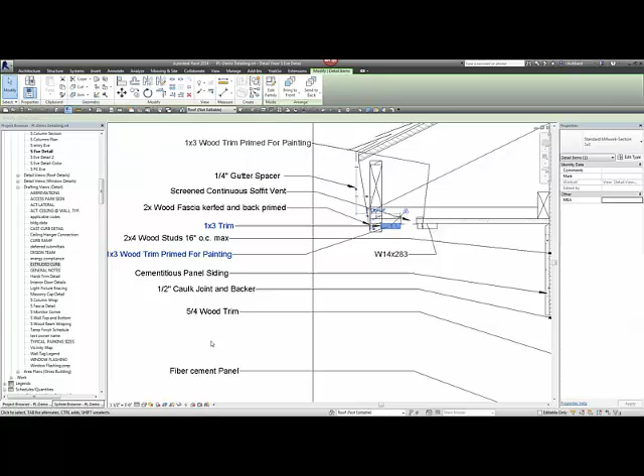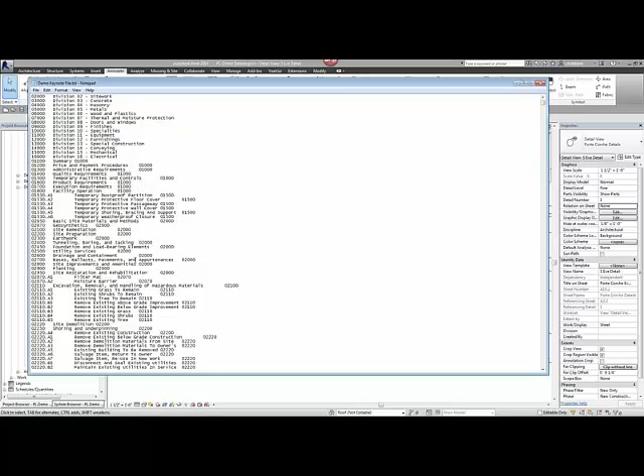Now, if we need to change that note, we can open it up here. You can see what it looks like in just Notepad. I usually quick search for 06220, and there it is. And you can see here's my note right here, primed for painting. We're just going to get rid of 'for painting,' we're just going to say 'primed,' just to make it shorter. Go ahead and save my keynote file.

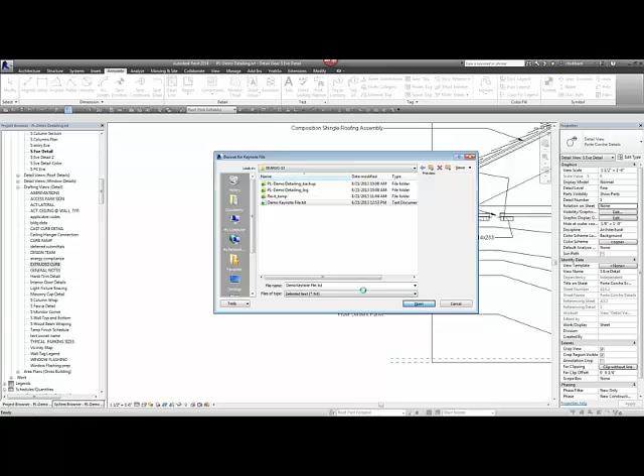Now, Revit hasn't picked up on it yet, so we need to just go back to that keynote file and hit browse, hit open. Oh, there is, okay, that's a new one. Hadn't seen it. We don't use them just because they're so restrictive, so I don't get into it very much.

So there you see my notes updated. It updated both of these notes, but it did not update that one because that one's still driving itself off the user.

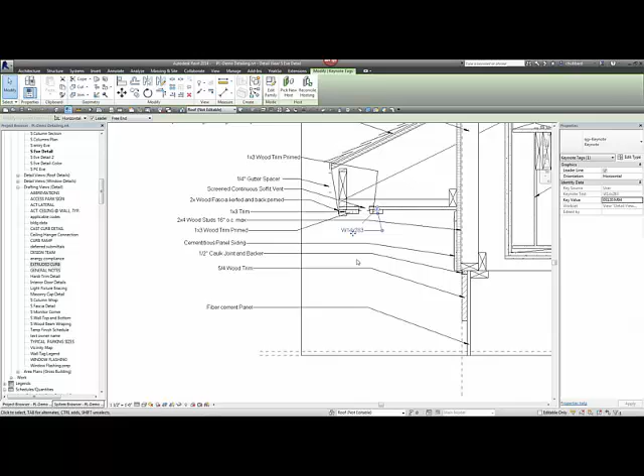So there's all the little techniques. But let's talk about how we get this all to work for us instead of against us. So the first thing I ask people to do is make a firm detailing library. Make your own, don't operate off the Revit out-of-the-box one. So typically we start with the out-of-the-box one because there's thousands of details in there ready to use.

We use a rename tool to add a prefix to all of the detail components in your new library. So basically, copy the Revit detail library over to your network somewhere, and then there's a number of different rename tools out there that you can get to prefix all your files. And then we delete the uncommon ones and/or folders. We get rid of some of the site ones, some of the structural ones, and some of the oddball ones that we just never use, because they just add clutter to our library.

And then we change the organization if desired. Revit's detail library currently uses MasterFormat 2004. Some people find that onerous. Some people just like to have them all in one folder with nice naming conventions. Some people create their own folder system, etc. And then use them. As soon as you start to use them, you'll start to find things that aren't quite right. You'll make some little edits to them. So also, let your users alter them. Don't lock the library down, okay?

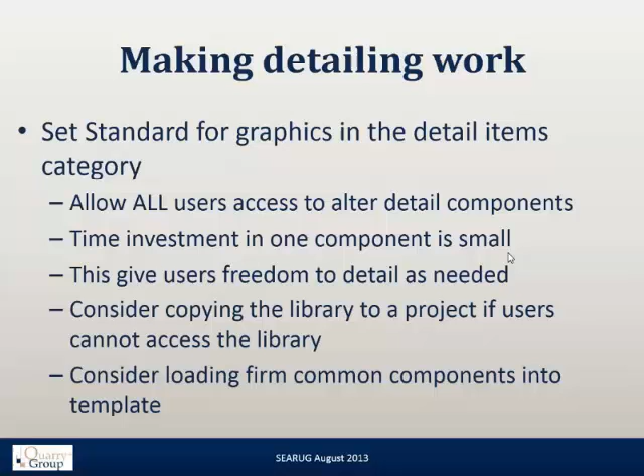And then set up your annotation standards. Decide on a tagging method. Do you guys want to use material tags and component tags? Do you want to use a keynote system? Make all your tags ahead of time and make them all look the same so that you can't tell the difference.

They all just look like notes. All my tags look like notes. End users can't tell the difference. And most people, when they look at my Revit file, if they haven't actually clicked on stuff, think I'm just using text. And then make sure all those tags are in the template ready to go.

And then decide what parameter those tags are going to use, and always use the same parameter. So the user jumps into a detail component, he knows to change the description. He jumps into a material tag, he knows to change the description. So use the same parameter in the different tags so that the annotations work correctly.

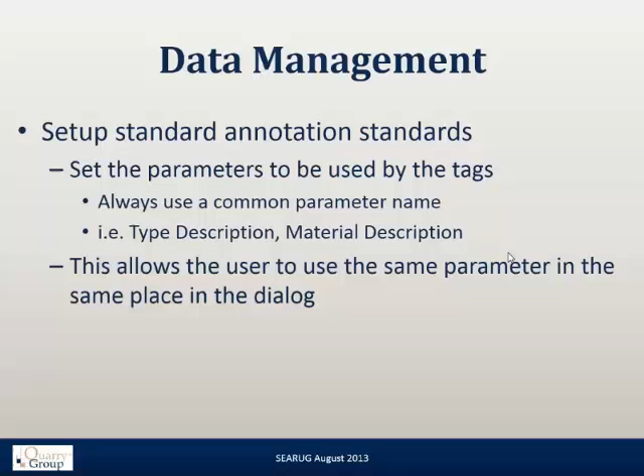And the other option would be to set up a shared parameter. Call it XYZ firm annotation. You can put that into materials, you can put that into components, you can put that into objects, you can put that into details. If you have this common shared parameter, then the user can fill out the same parameter in every object and get the same information from different types of tags.

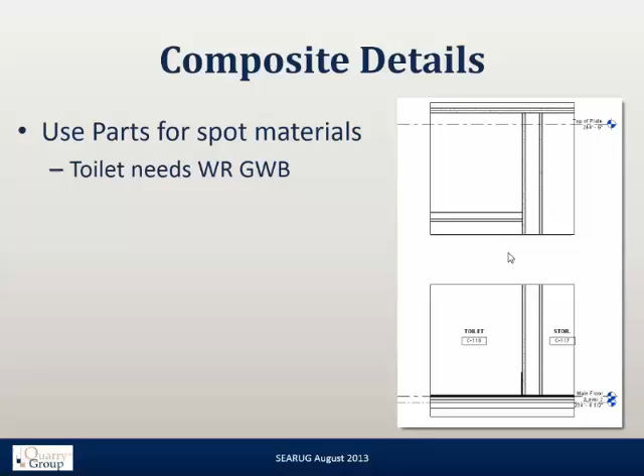So use all the available tools so you can create fast, smart details. Combine them in smart ways so that the details reflect the model information and are correct in your annotation and graphics. As I said before, use your parts to pick up spot materials. So the toilet room needs the water resistant.

And this, I color-coded my detail so you guys could see what a composite detail looks like. And I'm just going to go ahead and bring it up in Revit. Did we lose it? Yay.

So this is the same detail. The model objects are in pink. The parts are in blue. The detail components are in red. And the lines are in green. So you can see we do have a few lines in there. But the note at the top, which, by the way, I did not add to this detail, was already there.

Lines are placeholder for the structural model. So in the case of this detail, the structural engineer had not given us the joists or anything else for this particular part of the model. And so we drew lines in there so the detail looked right until we got the structural model as the background and could get rid of them.

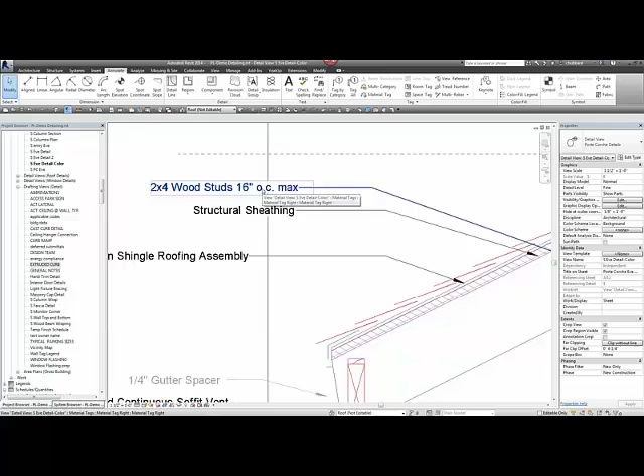And so we have a big red line, what we call red line text that we use to put notes off the side of our details, notes to ourselves basically saying, hey, there's a placeholder here for XYZ. And so if you look, you can see that that's a material tag, material tag, material tag. So most of these are being driven off of material tags. That's actually a component tag.

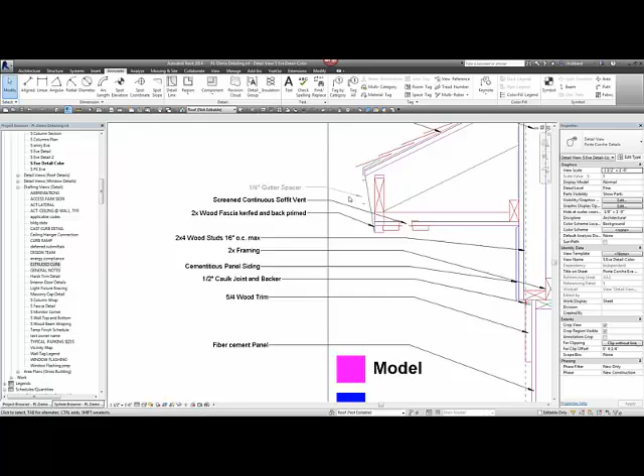There's the actual structural model itself, and you can see what I did was the pieces of text are actually half-toned. So you can see we've got 1, 2, 3 pieces of text, and they all refer to structural elements that aren't there yet. The number of pieces of text we use in a detail is typically in the single digits, and we use them sparingly for general notes or to identify items not yet in the model.

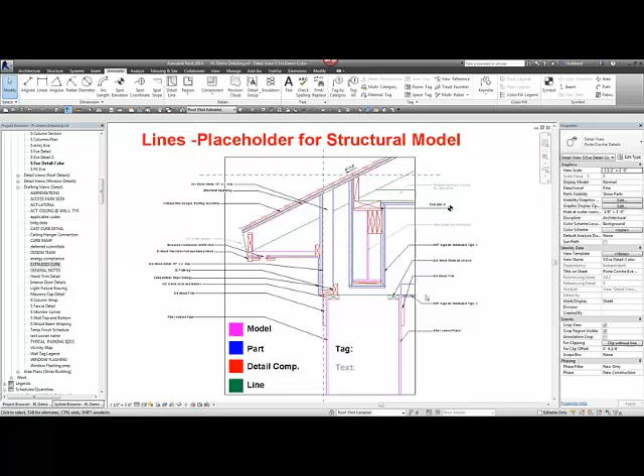We want to make sure that all of our notes are consistent and all of our objects are annotated in the same manner. If we screw up a note, it screws it up across the entire project, but we only have to fix it once.

So a couple of things with this one: the vent masks the soffit. Parts change the annotation because the GWB has a different note. Remember, the parts will show up in different views. The parts are tagged by material, and the details are tagged by component.

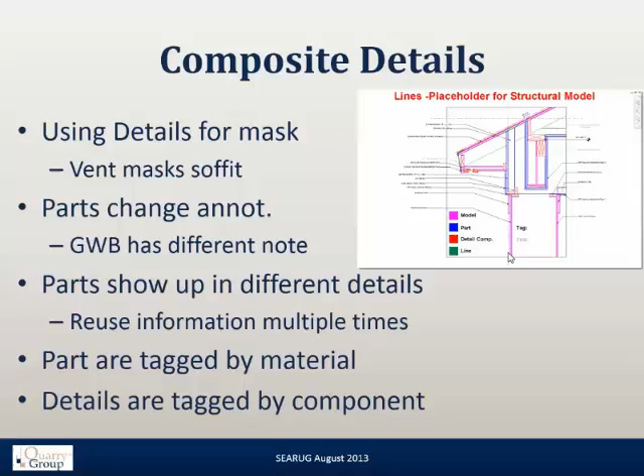So in conclusion, detailing in Revit can be easier than CAD. We find this way easier than what we were doing before. Revit's tools will save you time and help you reduce errors. Your detail components are fast, they're easy to manage, and they're quick to use. Libraries of components can be created in a couple of hours for the entire firm. And using your annotation tools will save you time typing notes and reduce errors in mistyping, misspelling, etcetera.

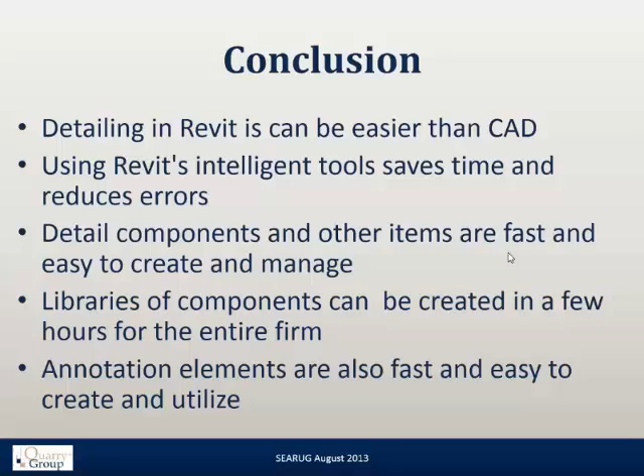When you place a detail component in, say, a section view, if you move the component, like the wall or a panel, are those kind of sticky to that component? So the question was, if you place a detail component in a view and you move the wall or element underneath it, will the detail component move with it? The answer is no. You will still need to go back and make sure that your detail components match the model.

But if you had a drafted view and the model shifted, we'd never know, and it would just be wrong. At least this way it'll be obvious that it's wrong, and it's a drafting error, not an architectural error. So got time for one more. Anybody else have any quick question?

One thing to add, you can lock. Yes, but his comment was you can lock to model geometry, and yes, you can do that. What tends to happen is if the model moves, then the element gets deleted rather than shifting. If it can shift, it will, but if it can't shift, it just goes away. And when it goes away, it takes out the note, so it's a sort of chain reaction. What happens is the user doing it gets a little dialogue box that says, by moving this wall, you're about to delete 750,000 objects, and he says okay.